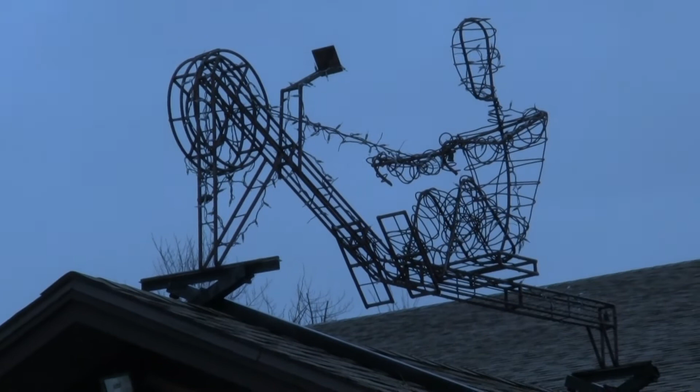My name is Kevin Stevenson. I'm a mechanical engineer here at CONCEPT2, working in R&D on both oar and indoor rower product development. There's 10 of us in the engineering group.

My name is Trevor Braun. I work at CONCEPT2, a rowing company here in Morrisville, Vermont. It's been around for quite a few years. I started at the company about 9 years ago out of high school. I had wanted to work here when I was a little kid, and now I do.

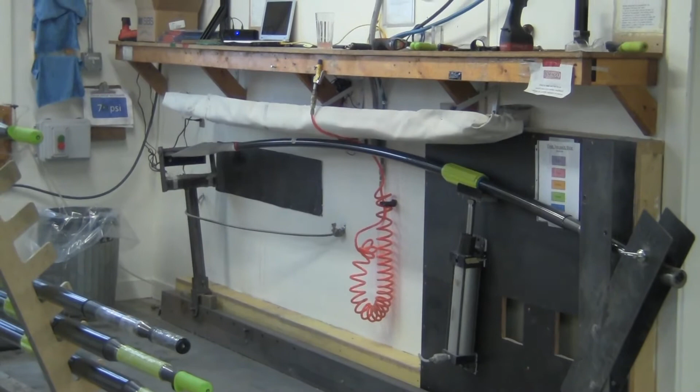CONCEPT2 was founded in 1976 as a manufacturer of composite rowing oars and rowing equipment. Started by two brothers, Dick and Peter Dreissigacker, who were both aspiring Olympians and engineers, and saw a need for a more reliable, lighter, higher performance rowing oar. They moved to Vermont to establish that company, and the first product was a rowing oar with a carbon fiber shaft, carbon fiber blade, and it radically changed the sport of rowing and made everything faster.

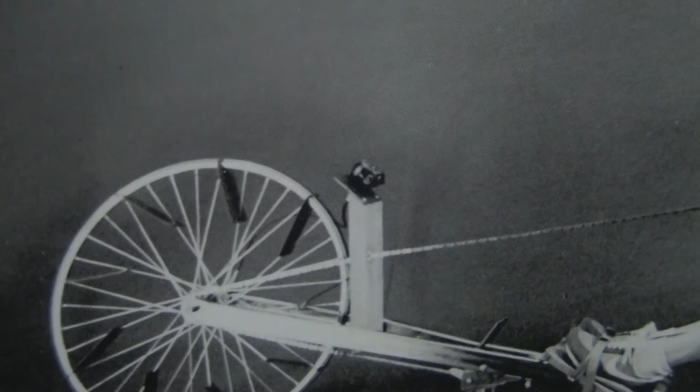And then in 1981, the original Model A indoor rowing machine was released, which again transformed the sport of rowing and changed how rowers trained during the long, cold northeastern winters. And now the indoor rower is ubiquitous all over the world as far as indoor training is concerned, and the appeal has branched out beyond just rowing, and is now generally seen as a great way to maintain a low impact, full body, high intensity fitness.

The SOLIDWORKS software and the simulation software are things that we knew about, and when we were faced with our entire engineering team getting up to speed on CAD software, it was a pretty easy choice to go with SOLIDWORKS because it's essentially an industry standard, and it didn't make sense for all of us to get trained in our own personal CAD preference.

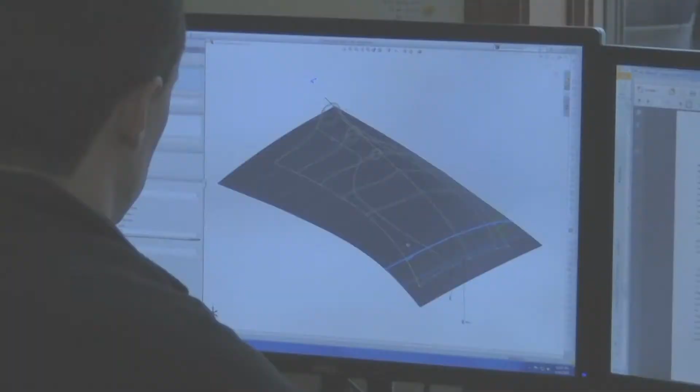I'd recommend it because it has become somewhat of a standard, and compatibility with our vendors has been important to us. I suppose I love complex modeling more than anything else. I've had the opportunity to do a fair amount of complex surfacing. The oar blade design involves quite a bit of complex surfacing work. We really need to make sure those surfaces, when we're designing our tooling and our molds, whether we're working on a new blade or refining a particular blade, are just right.

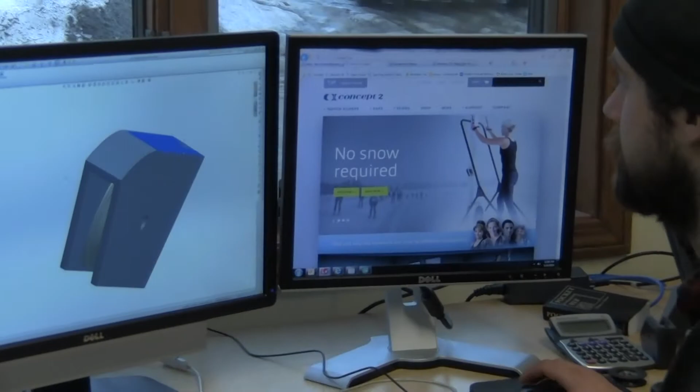I personally didn't have any significant experience with CAD software prior to using SOLIDWORKS, so I think it was pretty easy for me to grab hold. But we did have other CAD users here at CONCEPT2, and we felt there were enough folks using CAD and would be using SOLIDWORKS that it was worth having somebody come on site to do the training so we could all learn together. And it worked out really well for us. We were able to work together during the training and then use that moving forward to make sure everybody was up to speed.

We've had Fred, our 3D printer, in-house now for 2.5 years. And at that point, we were really spending a lot of money on outside services, print shops, and we'd send it out and get it 3 days later and they'd charge you an arm and a leg for it.

The printing products have just worked incredibly well for us. I don't think there are many other options for that sort of repeatability, and a lot of people will tell you, oh, you could just buy a desktop printer, like a MakerBot or something. Why would you spend so much money relatively on a professional unit? Well, because I haven't touched the thing in 2.5 years, and it just continues to print out very repeatable parts.

We've historically taken some risks and had molds cut when we weren't completely sure of how the part was going to come out. And sometimes that leads to parts that don't necessarily have all the features we could want, because we have to be sort of risk averse when doing something like that. So with the 3D printer, we can keep trying over and over again until we have something that looks like exactly what we're thinking, and then have a very high degree of confidence that it's going to work.